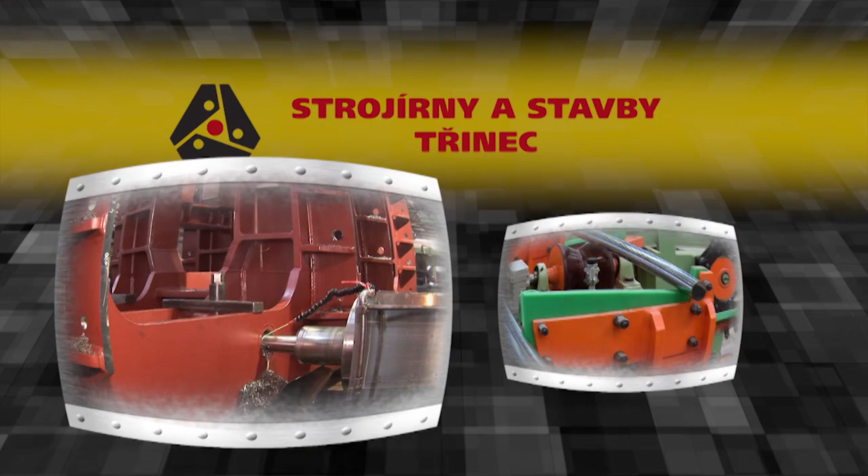Dear customers, this is a video presentation of Strojírny a Stavby Třinec, joint stock company based in Třinec, which is a 100% subsidiary of Třinecké železárny and a member of Moravia Steel Group. The company's production activities are focused on order-based manufacturing of engineering products and construction of industrial as well as civic buildings and facilities.

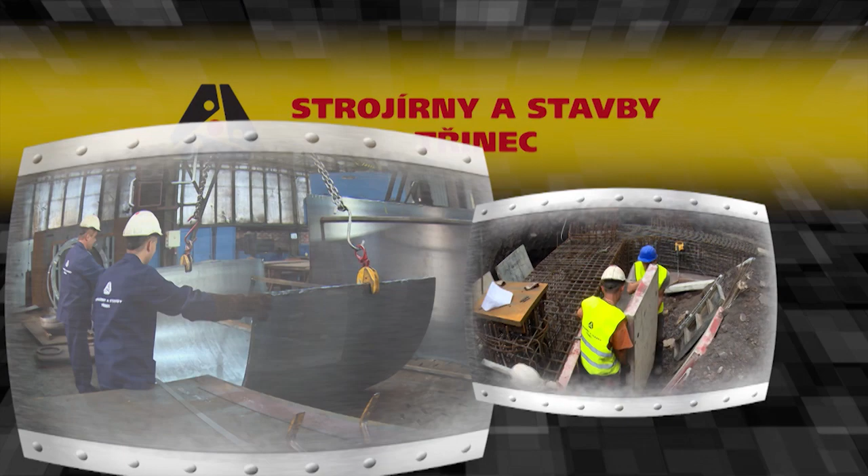The management system for quality and environment protection is based on international norms ISO 9001 and 14001, and our project management directives are applied in accordance with norms ISO 10006. Occupational safety and health measures on workplaces are based on OHSAS 18001. The company has also been granted a number of certificates and licenses for welding of complex steel structures, pressure vessels, as well as pipeline systems.

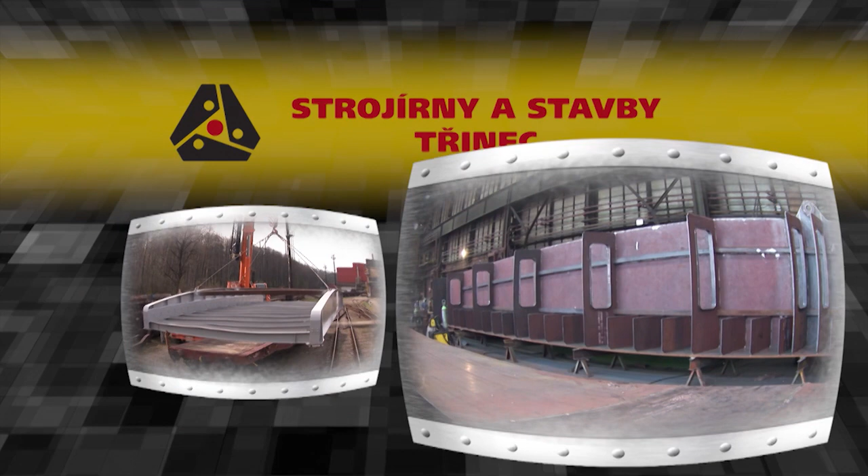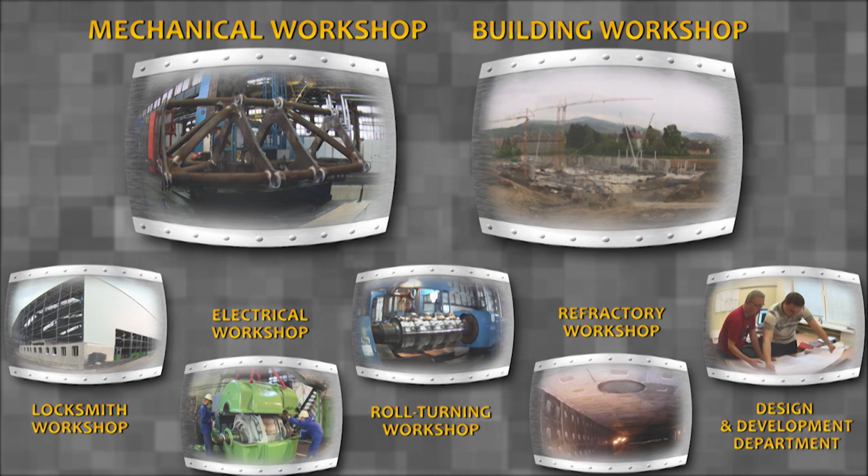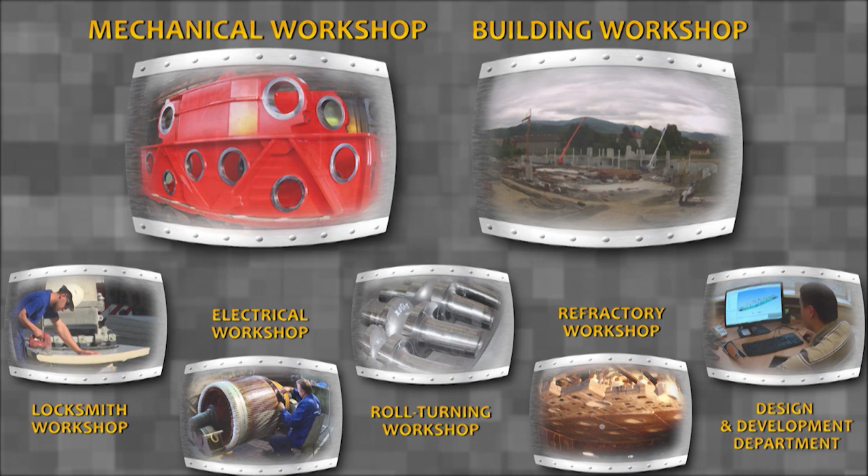The organizational structure of the company consists of 6 production plants and an independent design department. The main goal of the company is to be a reliable partner in the area of deliveries of engineering products and construction projects for domestic and foreign customers, as well as for the parent company, for which we carry out mechanical and electrical maintenance and repairs of steelmaking aggregates, refractory lining, and construction works.

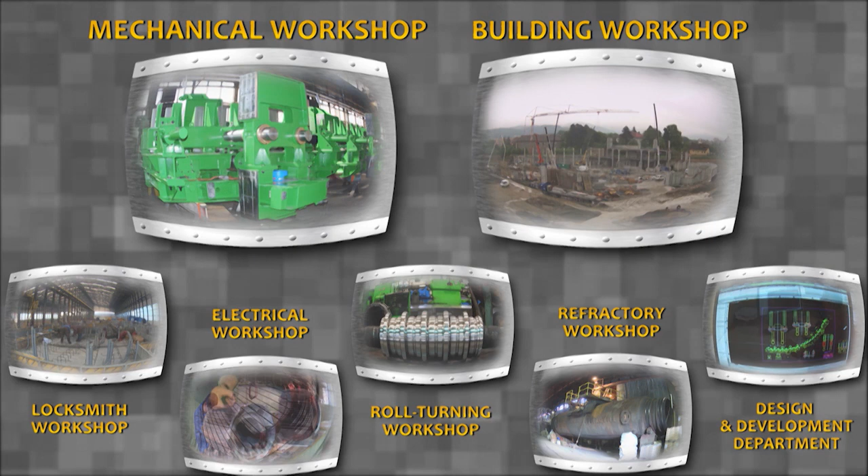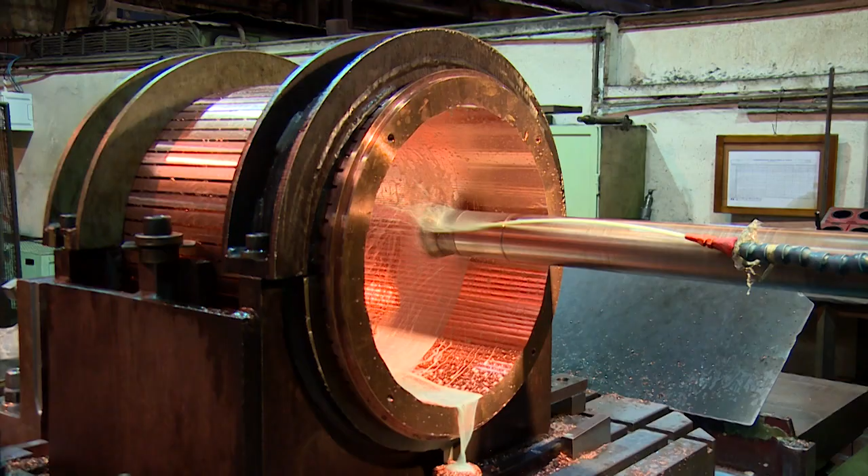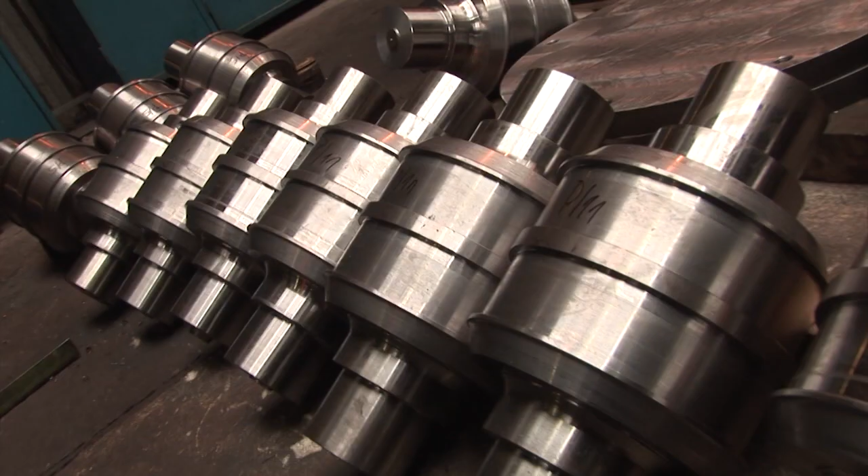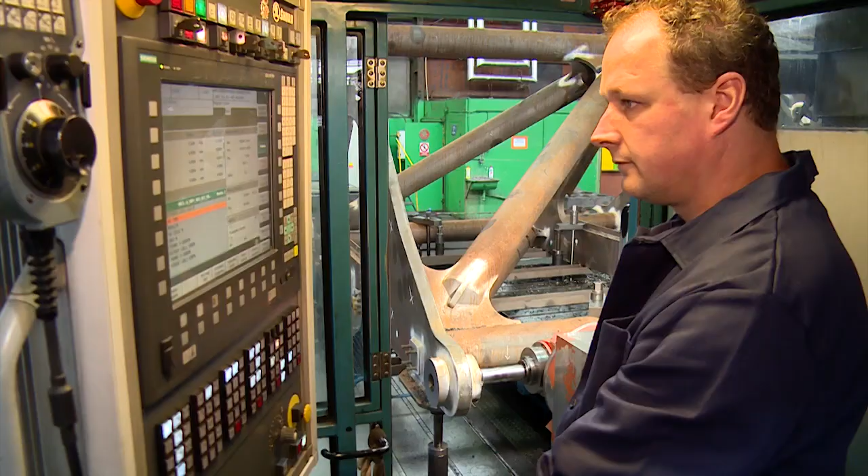Our engineering activities are focused mainly on piece production based on drawing charts with the aim to deliver high quality and precision of work pieces. This relates specifically to deliveries of complex engineering and technological units, conveyors, steel structures and weldments, offshore weldments, pressure vessels, cranes, machine parts and components, forgings and metallurgical rolls. Production of these products is realized in halls equipped with bridge cranes with maximum weight lifting capacity of 40 tons and a number of modern CNC lathes and metalworking machines.

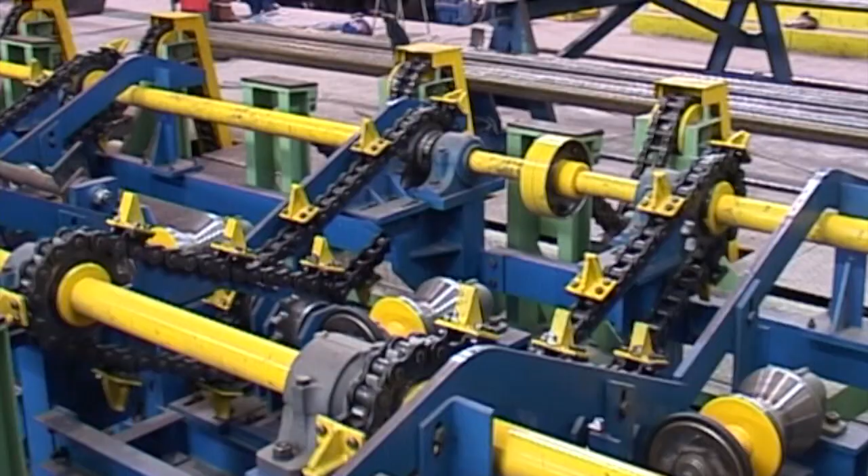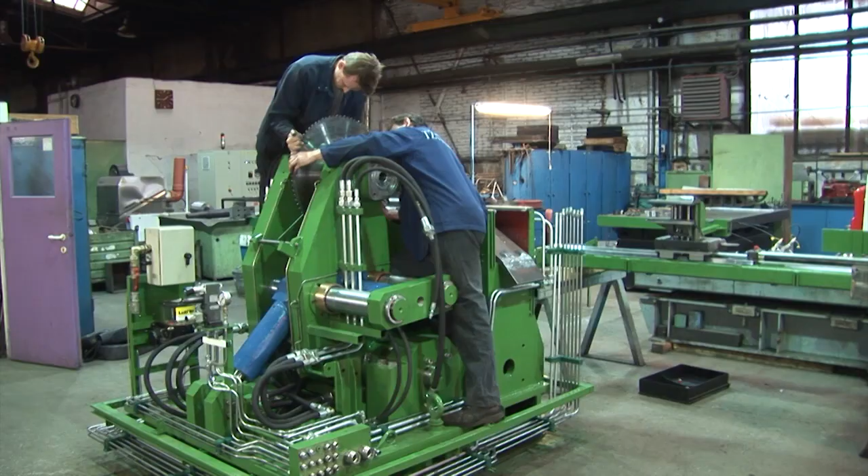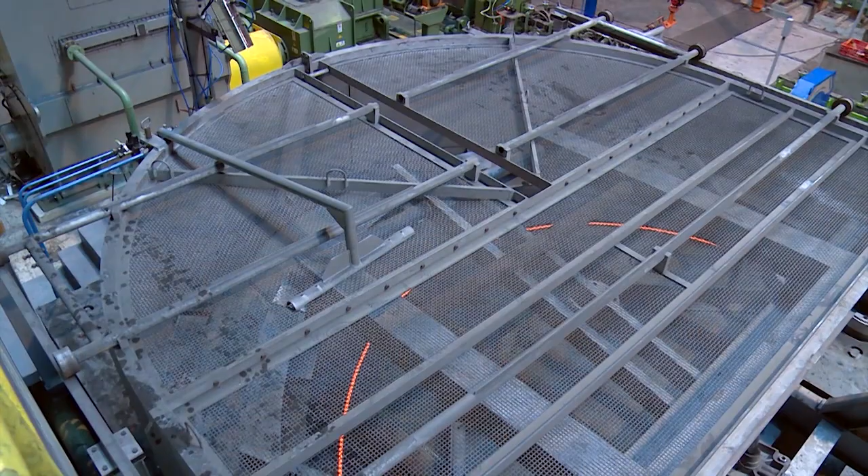In the area of engineering technological units, our company is focused mainly on deliveries for metallurgical industry, such as rolling mills, steelworks, and coke plants. We realize turnkey deliveries, which means they include deliveries of electrical installations, hydraulics, lubrication, and control systems. These shots, which were taken during reconstruction and modernization of the rolling mill, show some of the devices in the production process, such as the loop table for the wire rod mill, the straightening and tempering line, and a number of conveyors.

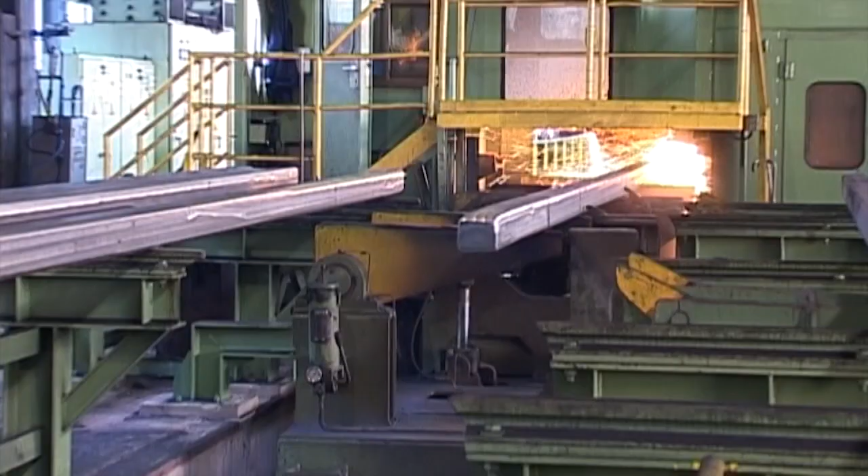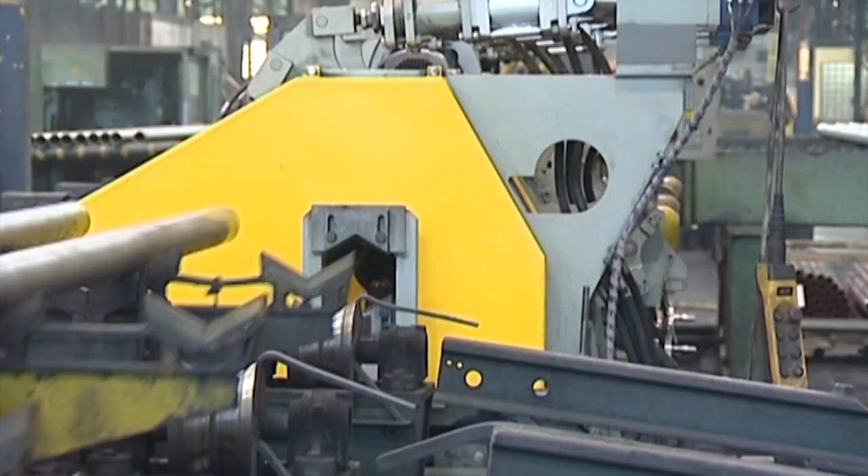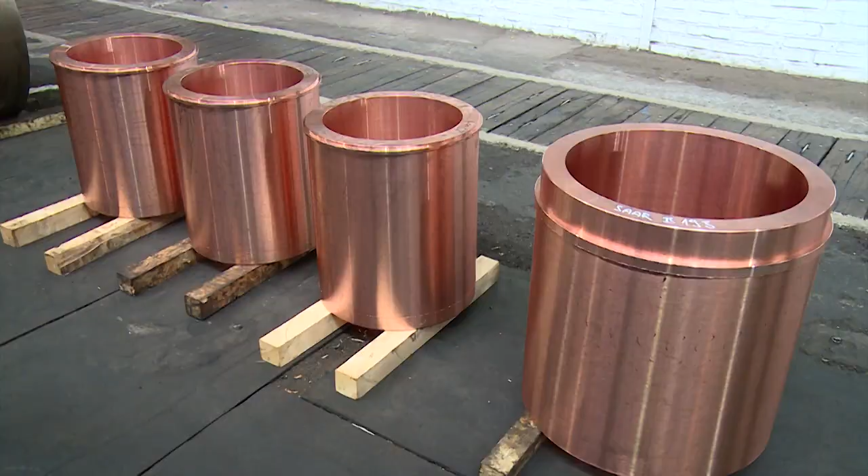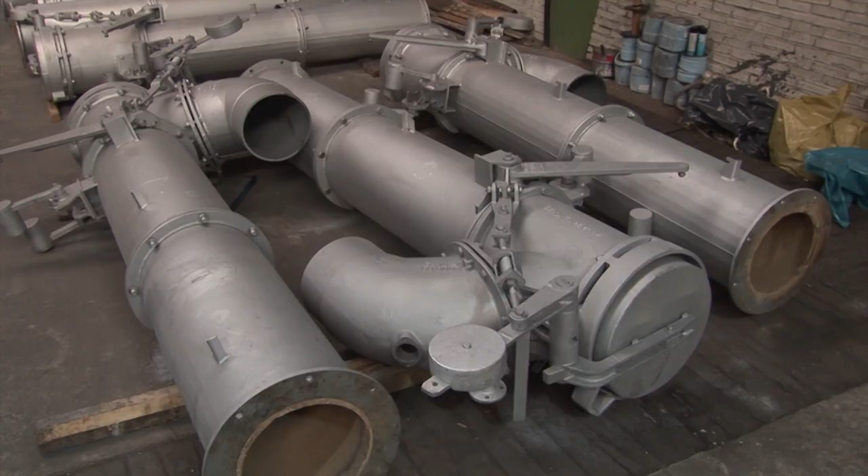Our designers also participated in realization of some products such as grinding machines for grinding blooms and billets, and the non-destructive testing bed, which is a part of the non-destructive testing line for detection of longitudinal or transversal defects in pipes. Our permanent assortment of deliveries for rolling mills comprises production of components for continuous casting machines, such as machining of copper crystallizers or production of casting components, whose assembly you can see in this shot. Within the project for modernization of the coke plant, we produced individual parts and ramming devices, which you can see undergoing functionality tests.

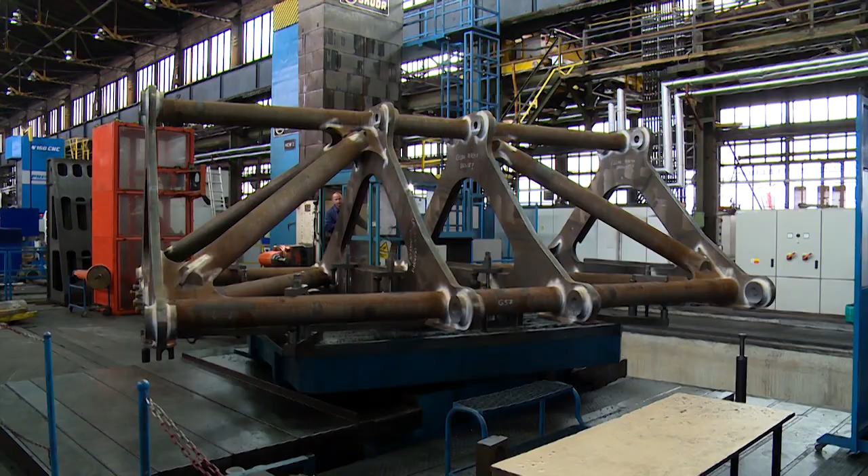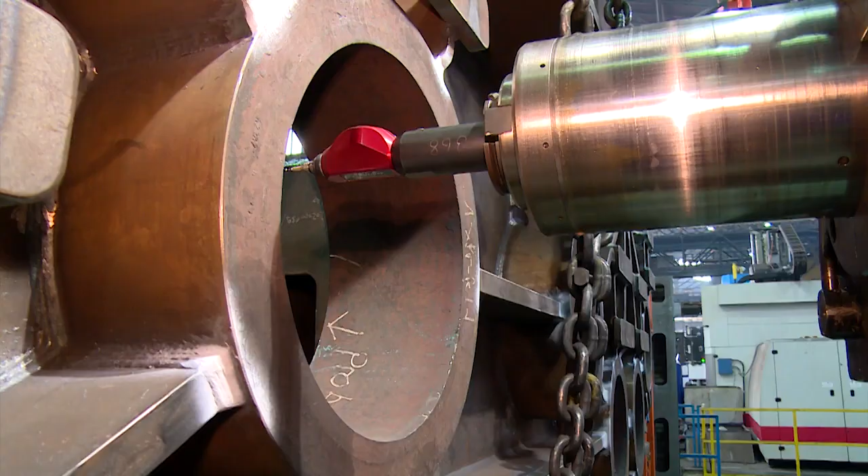Deliveries of offshore weldments represent another important activity of our company. In these shots, you can see how they are produced, from welding, precise machining on CNC machines, surface finishing, to final takeover by customers.

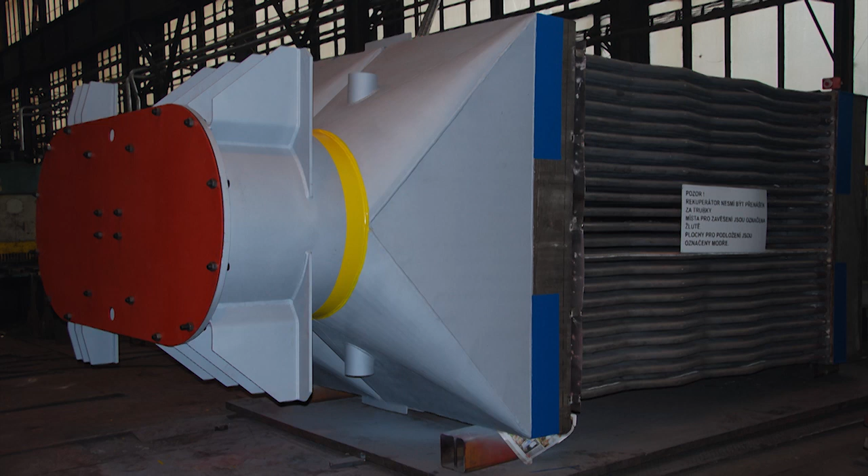In the area of energy production, our company is focused mainly on manufacturing of weldments for turbo machines, stainless recuperators, boilers for biomasses, and pressure vessels. As an example, we show our pressure vessels, specifically those used for storing nitrogen.

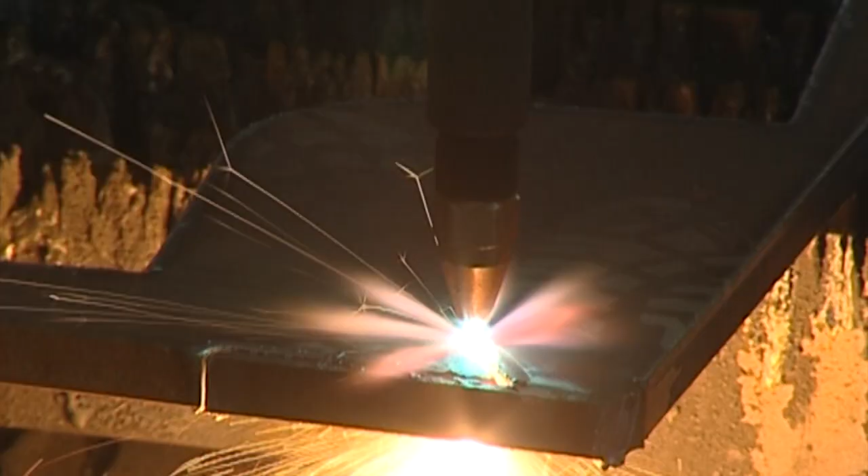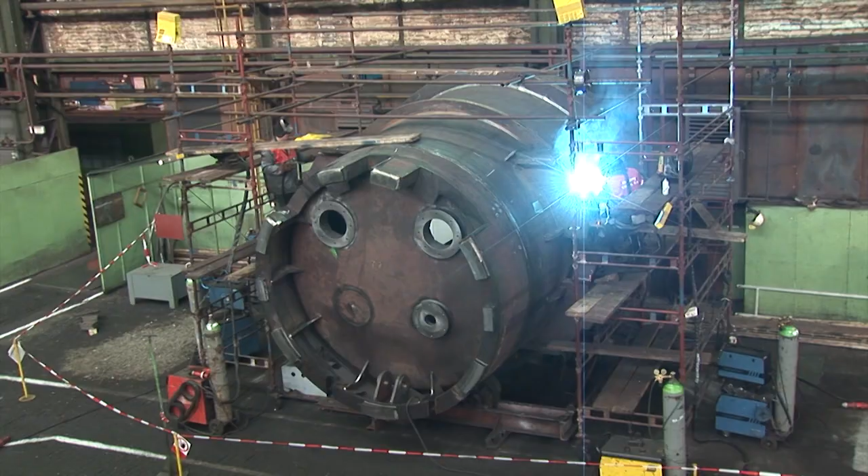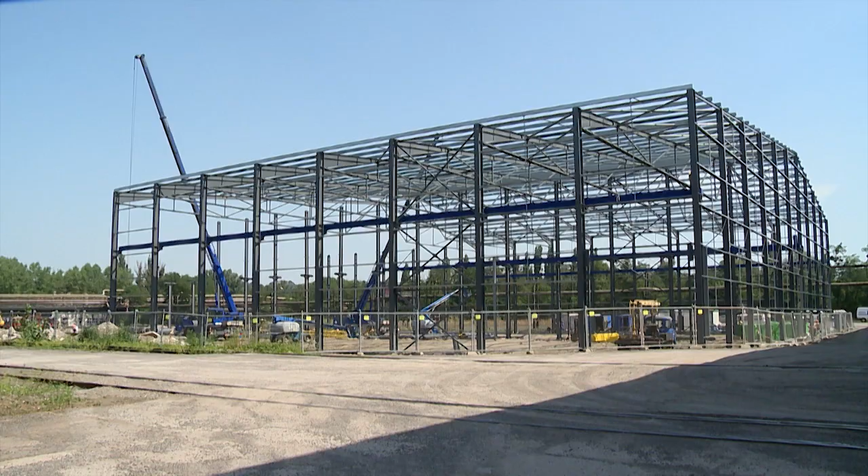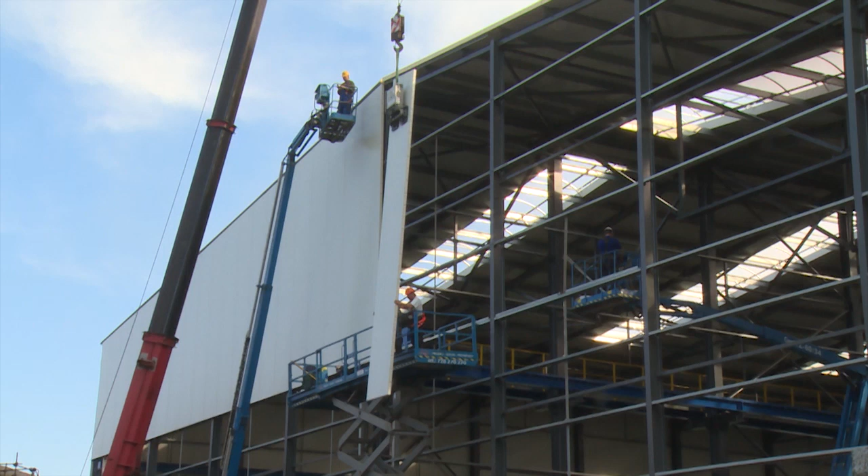We offer production of steel structures and weldments, including surface finishing operations, at the volume ranging from 200 to 300 tons per month. This group of products comprises, for example, production of welded ladles, including machining and annealing in order to release the structural tension, which are produced both for the parent company as well as for the external markets. The portfolio of steel structure deliveries also includes production and assembly of industrial production halls, including key delivery solutions such as electrical installations, lighting of production halls, as well as furnishing them with handling and lifting machinery.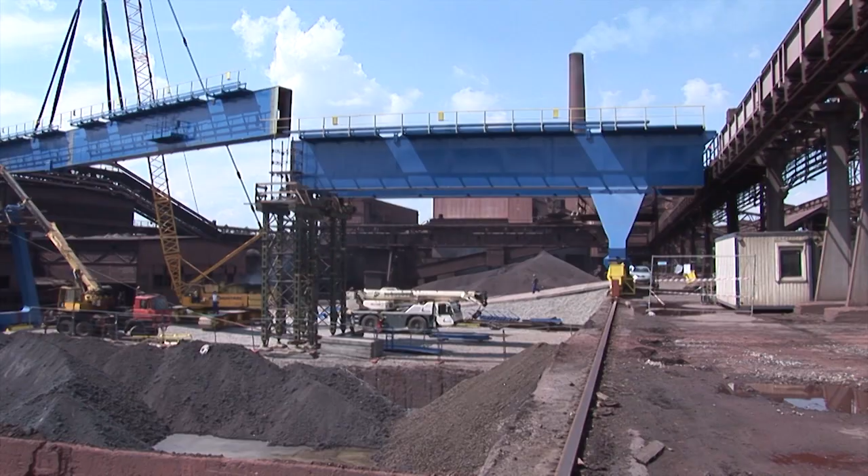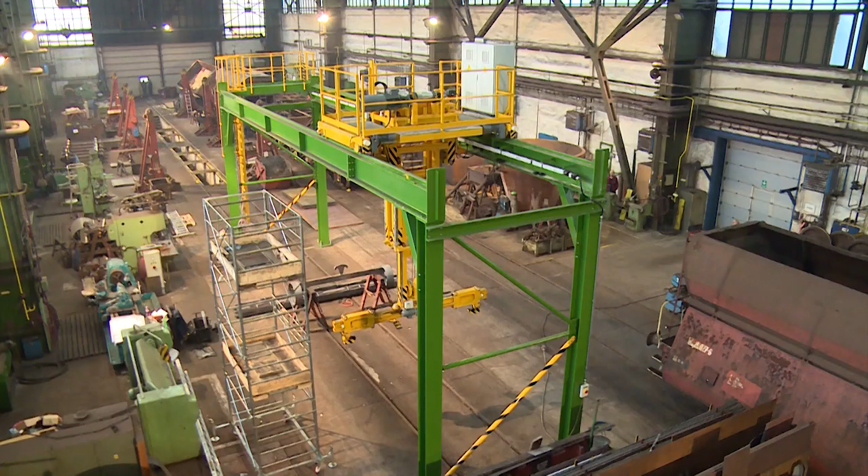We carry out manufacturing and repairs of industrial cranes and crane tracks, including turnkey deliveries, which include production, disassembling and on-site assembling of new equipment, electrical installation works, and putting in operation. In these shots, you can see the functionality test carried out on equipment for handling steel sheets, which was designed and manufactured by our company, assembled on-site, and put into operation for our customer in Asia.

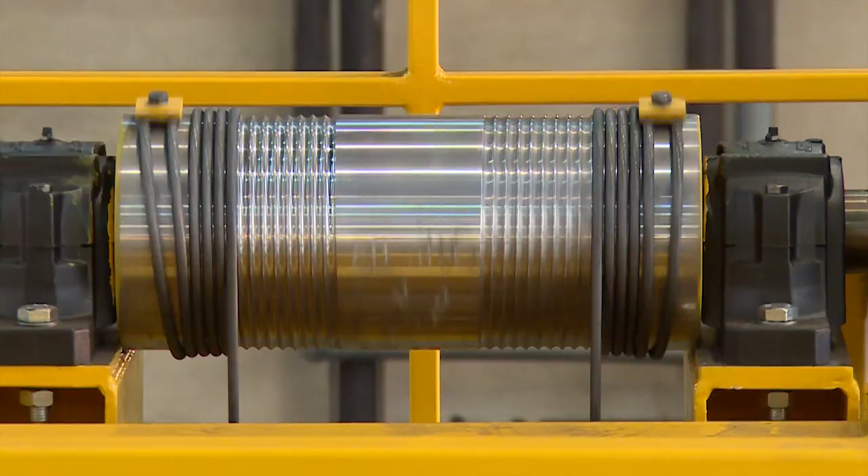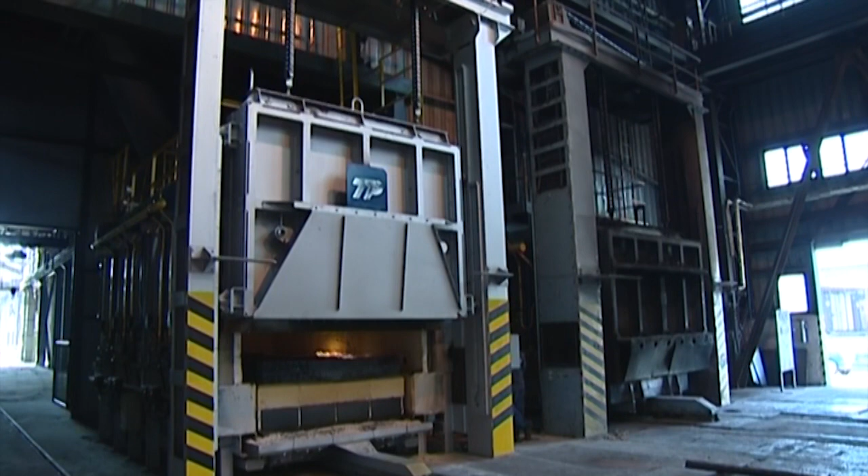The company's product portfolio also includes production of hammer forgings up to the weight of 3 tons. The input material is heated up in furnaces up to the forging temperature and then processed by means of the forging press. Forgings, especially forged bars and shafts, are offered as rough finished or final finished.

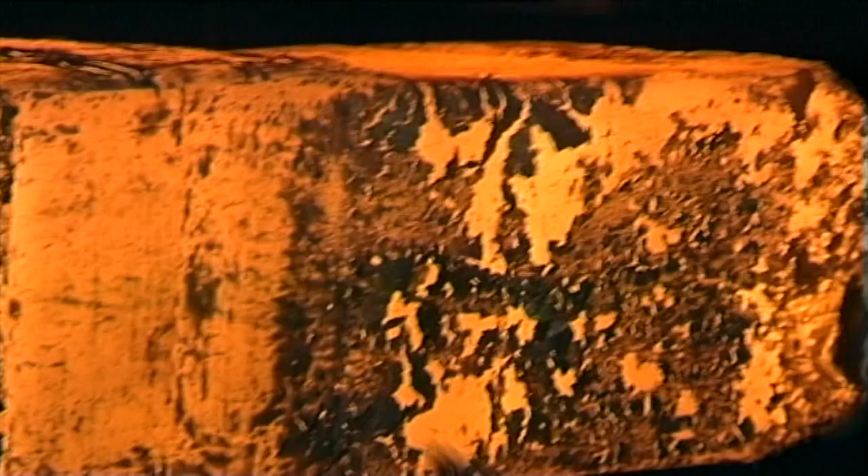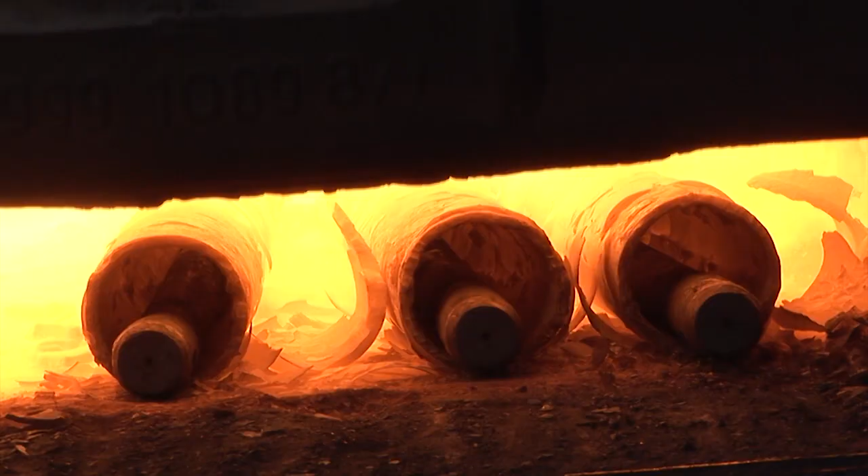New activities involve production of forged axles, including heat treatment and final finishing operations. Access to high quality and special grades of steel made by the parent company's steelworks makes it possible for us to respond promptly to the requirements and needs of our customers.

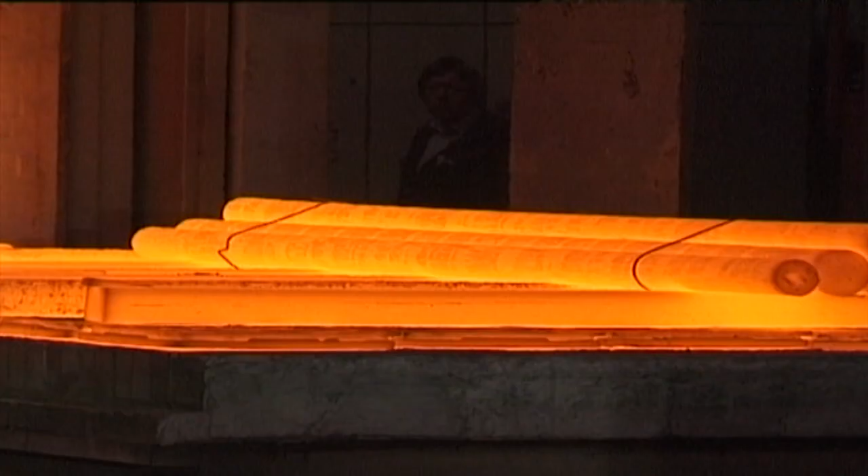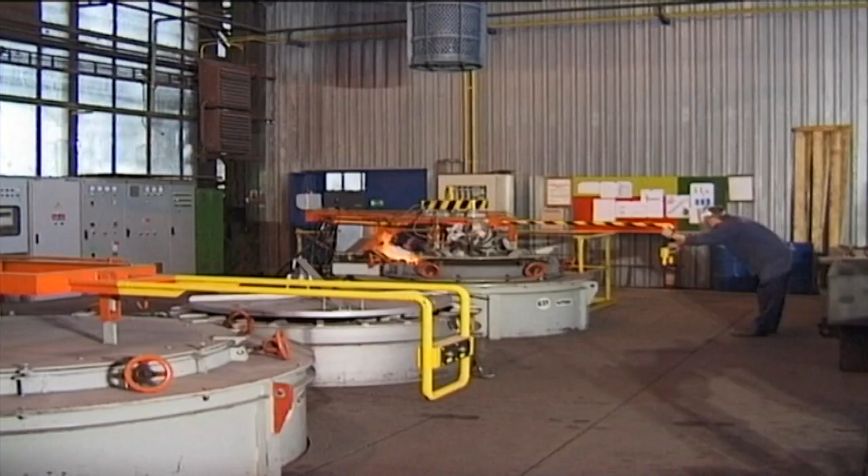After the forging shop, production continues in the heat treatment workshop, where forgings and other products are processed in accordance with applicable norms and requirements of our customers. Heat treatment is carried out in electrical car or shaft furnaces. We also offer heat treatment carried out by means of induction hardening and ion nitriding.

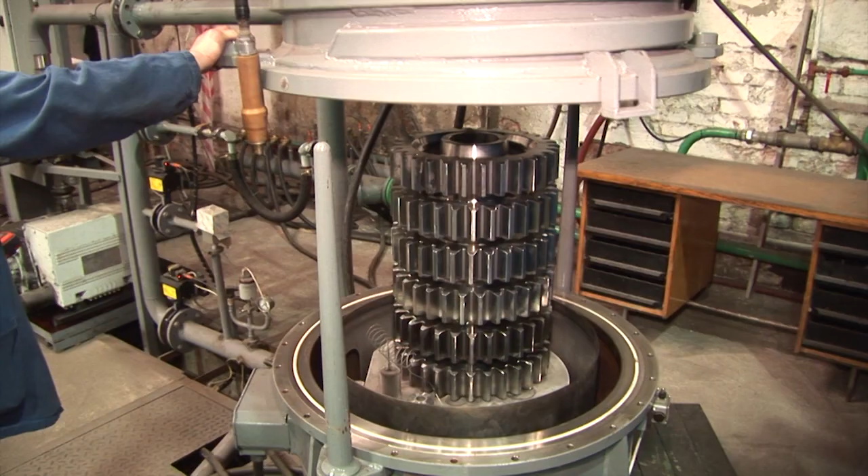In order to keep track of quality heat treatment operations, test samples are forged, which then undergo mechanical and metallographic tests in our own test workshop.

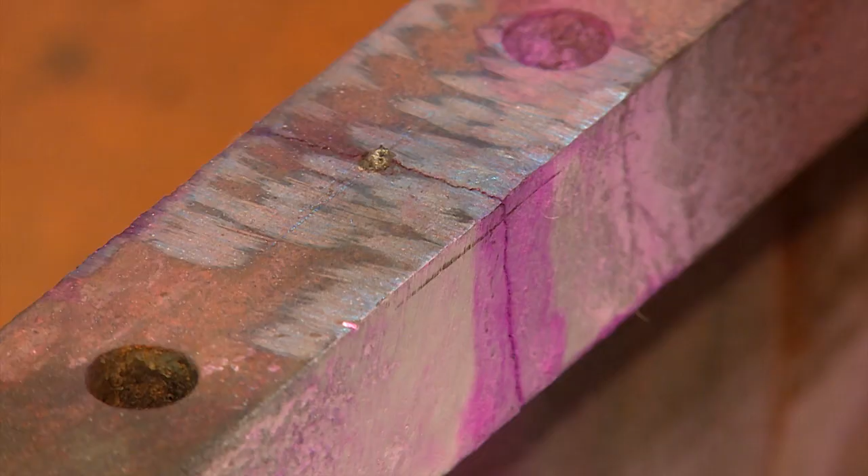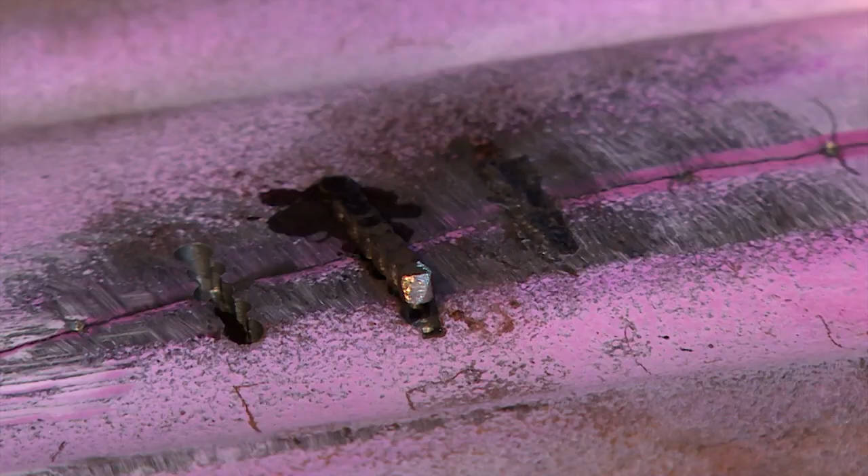Within the framework of our services, we also offer a special method for repairing cracked or broken off parts of castings and cast iron machine parts by means of the Metalock process, for which we hold a license for the Czech Republic and Slovakia. We repair cracked parts of castings in cold condition by means of steel locks made from

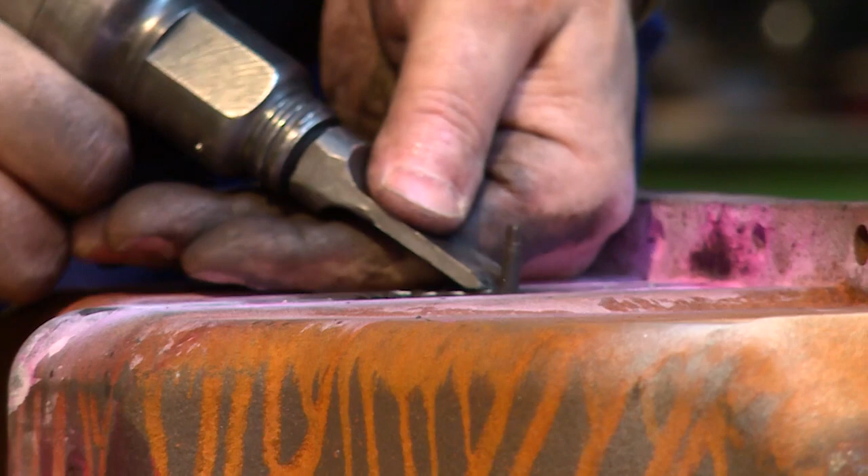special high-strength steel. The main advantage of this method is that it enables us to make repairs on the spot without having to disassemble the broken parts and thus eliminate the costs of a new component or a new machine. Repair of cracks and broken off parts doesn't cause internal tension, and the strength and tightness of the connection is comparable with the original material.

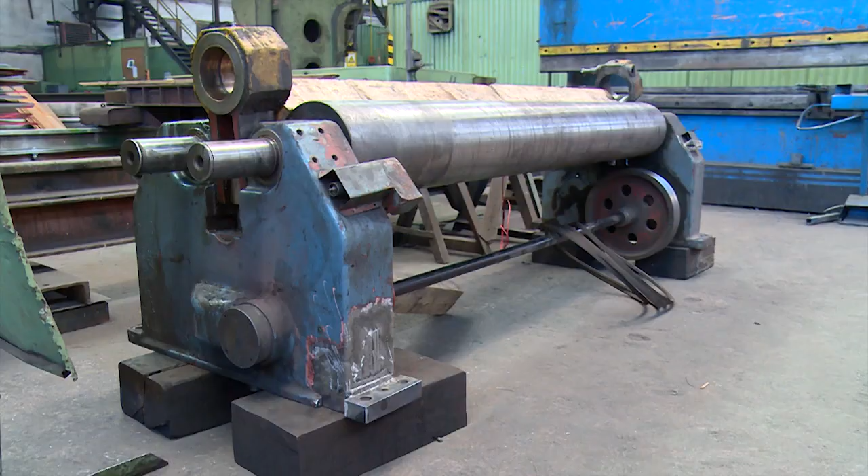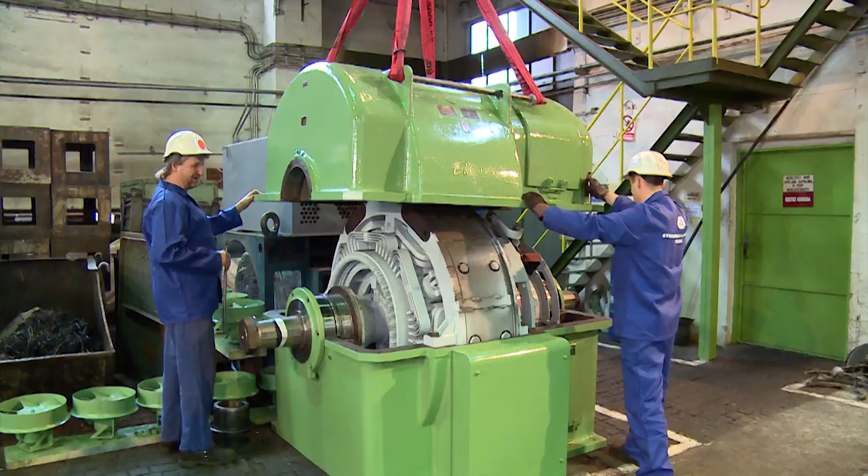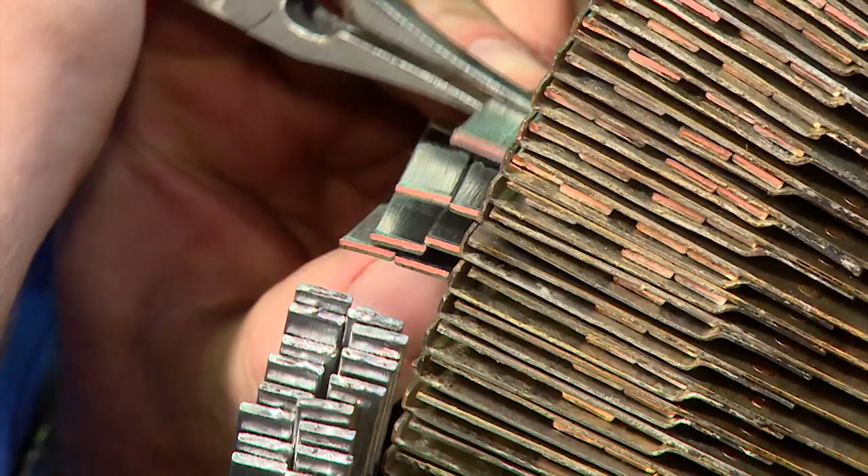Within electrical engineering works, we also offer technical inspections, repairs and rewinding of electric motors ranging from the lowest power rates up to high power motors of several megawatts. Besides that, we offer repairs of generators up to the power rate of 20 megawatts, repairs of transformers, crane load magnets, separators of welding equipment, and other electrical equipment.

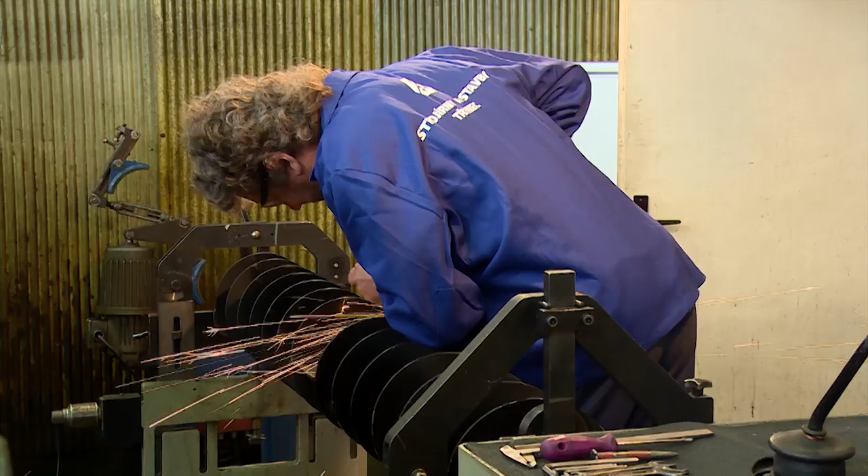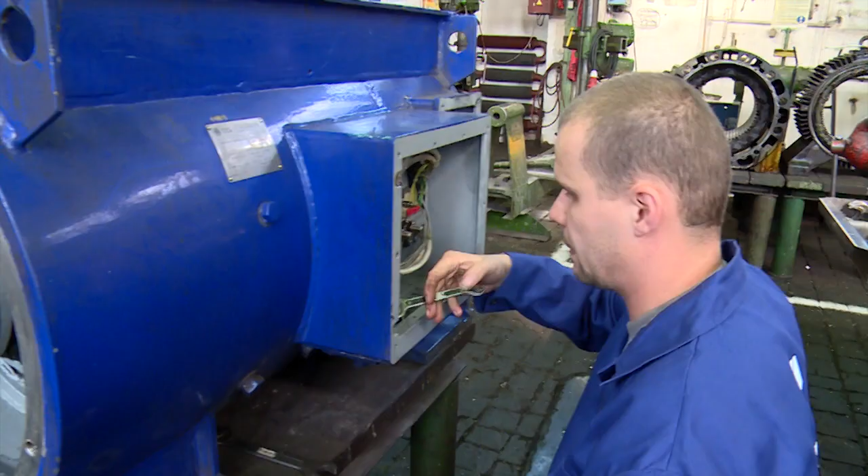Balancing rotating parts such as rolls, scroll feeders, and motor rotors is carried out on a stationary balancing machine. Electrical engineering works include installation of industrial low voltage and high voltage lines, production of switchboards and electrical fire alarm systems. Repairs and technical inspections of measuring devices, including calibration, are carried out in a certified laboratory.

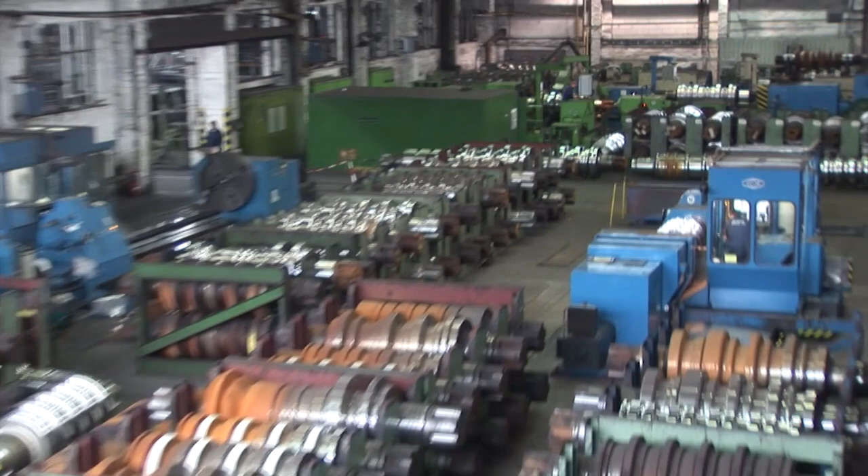We also carry out other activities such as production of metallurgical rolls, which has become our 100-year-old tradition. Calibration of rolls is carried out on the CNC lathe, on which we machine cast steel rolls, nodular cast iron, or forged rolls up to the weight of 40 tons.

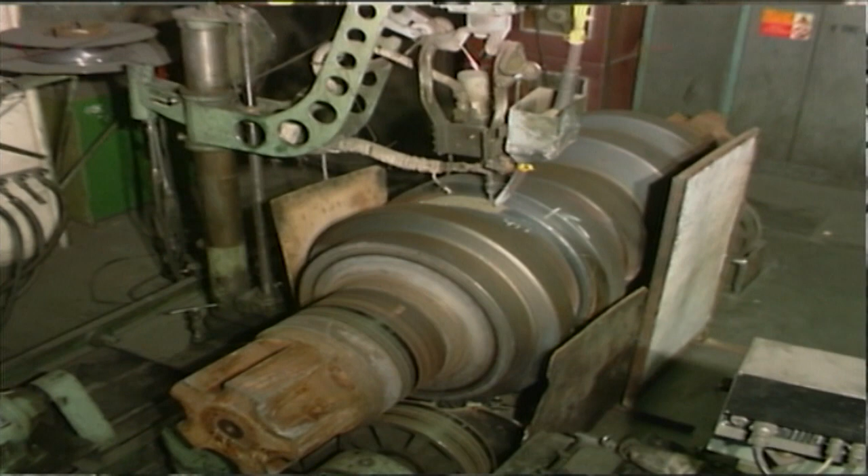We produce rolls as finished products, including their calibration, according to customers' requirements. We also provide renovation of rolls by returning or surfacing. Grooves and producers' marks on rolls for rolling reinforcing bars are made by means of milling.

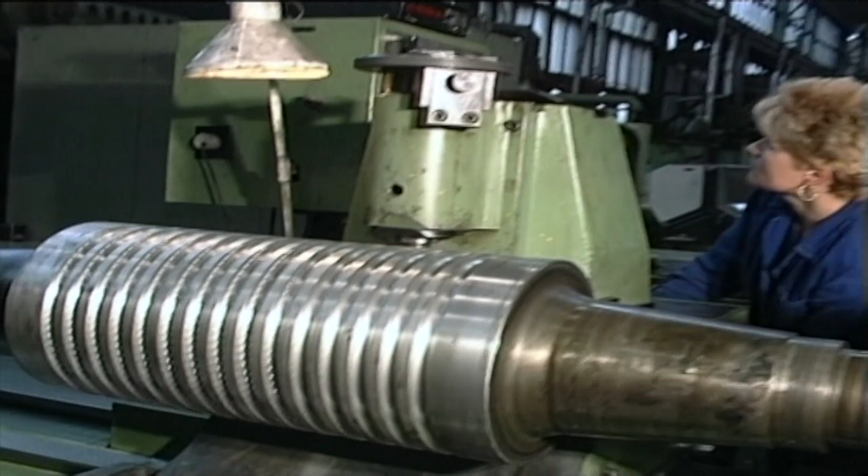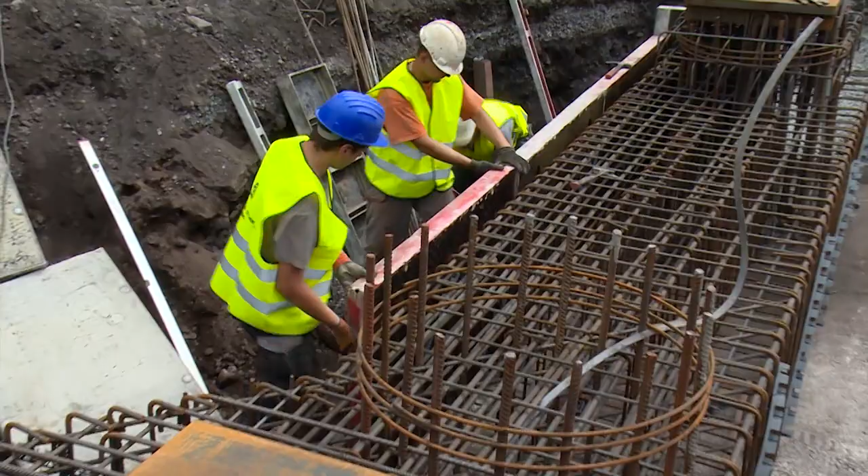In the area of construction works, we realize complex construction activities for civic and industrial turnkey projects, which include electrical installations and lighting.

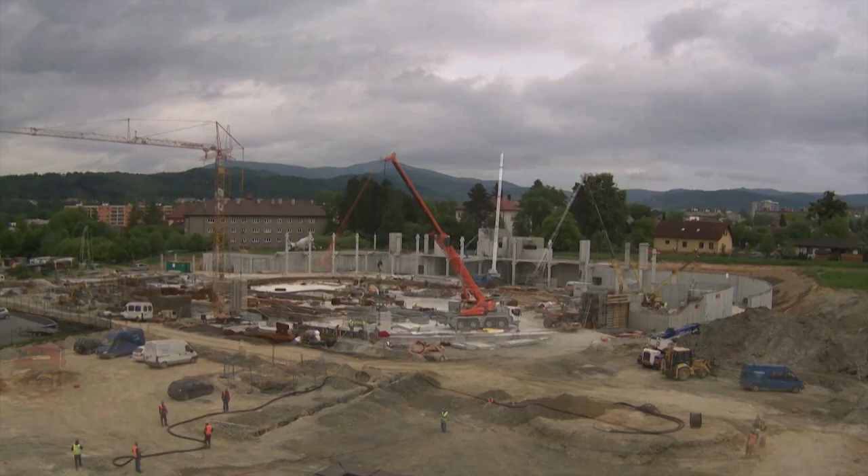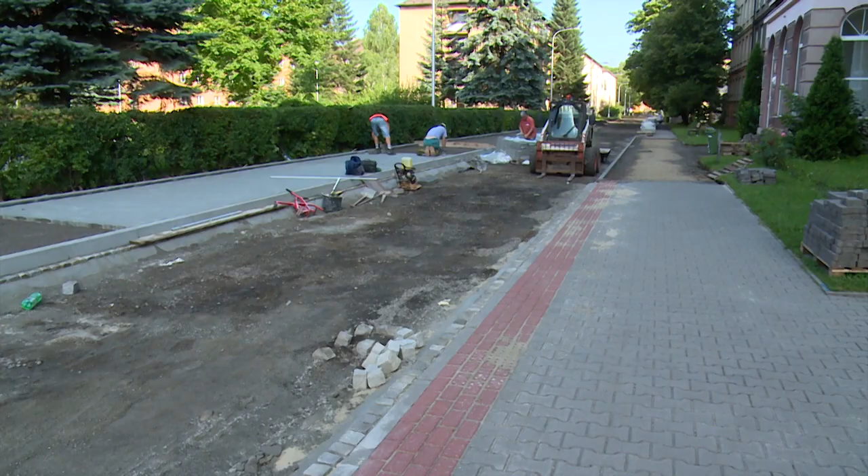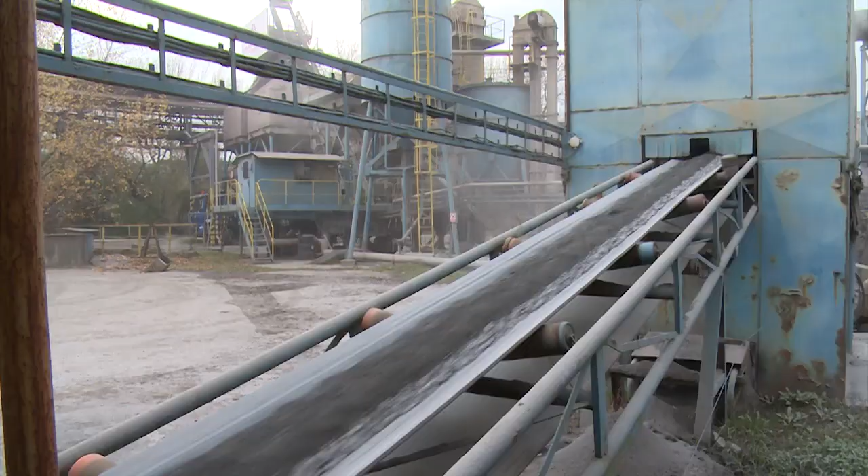Our building and construction activities also involve building and repairs of street pavements and the ground transportation infrastructures. The asphalt mix, which is used for making the final layer for surface finishing operations, is made in our own wrapping shop and is tested in our own laboratory.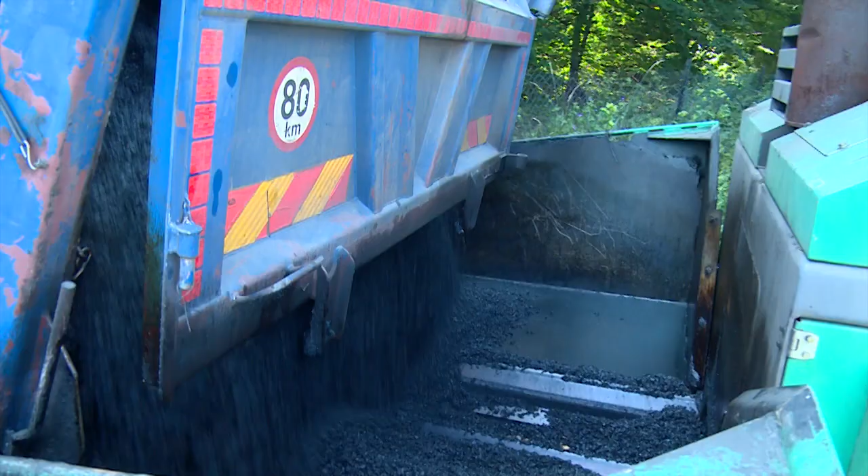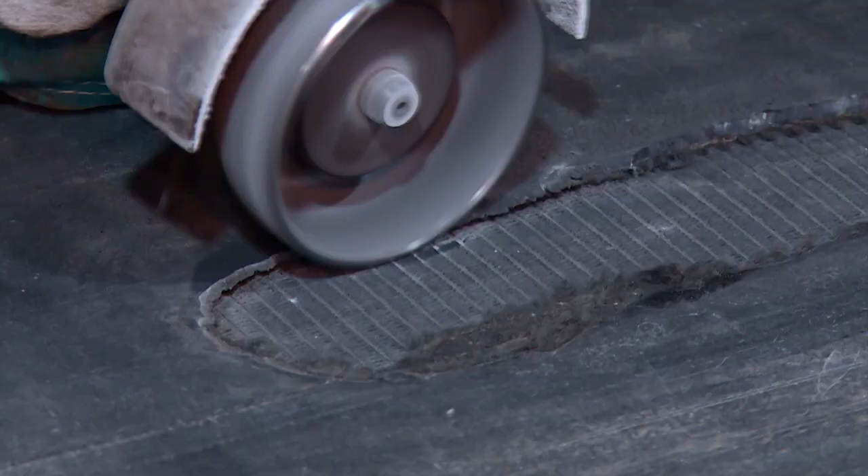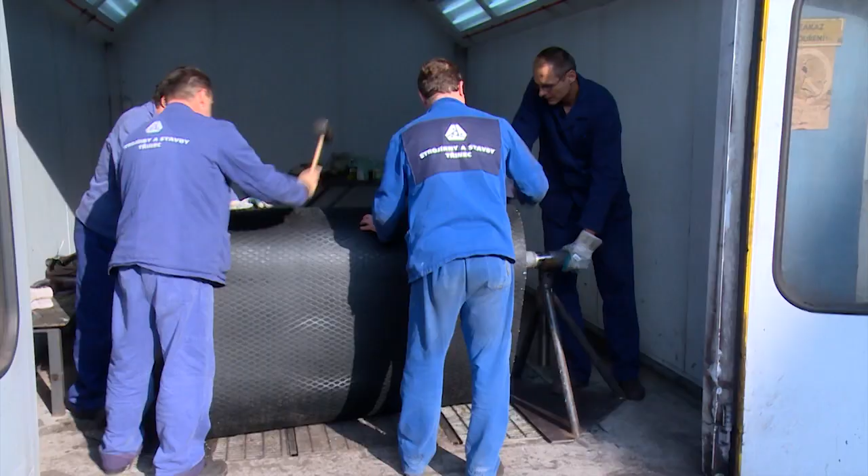In the vulcanization shop, we carry out repairs, replacements, and renovation of rubber conveyor belts on the renovation line. In this workshop, we also make pressed rubber products, rubber coating of drums and rollers.

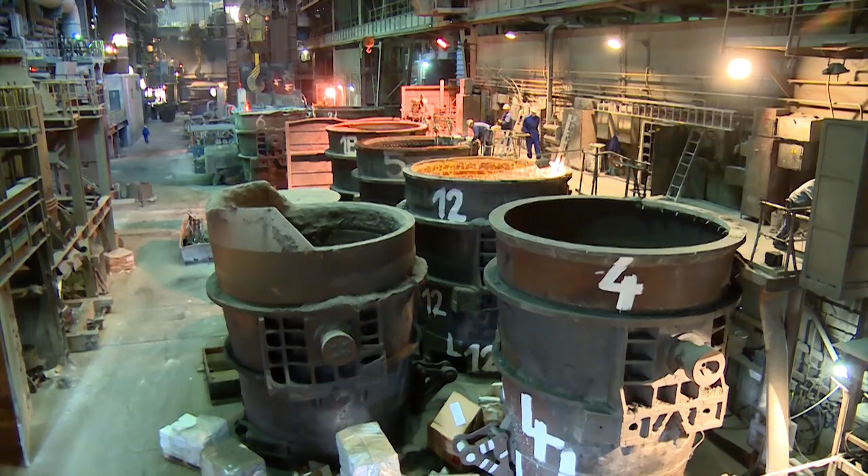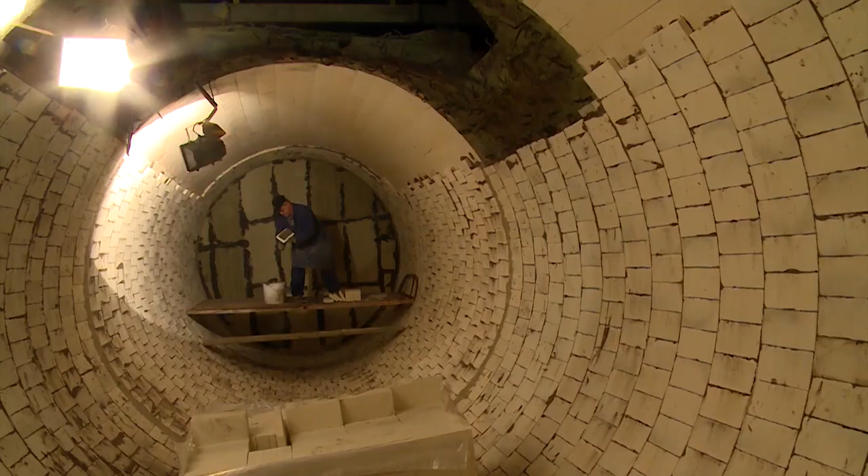Within our refractory works, we carry out repairs of refractory linings in metallurgical aggregates, not only for Třinec Ironworks, but also for external customers. We also carry out demolition works and build refractory linings in ladles, intermediate ladles, and furnaces.

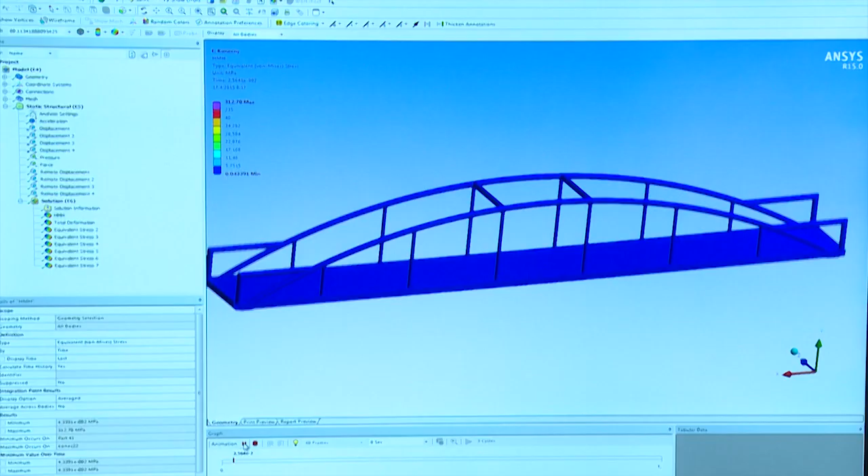The design department, in which mainly production facilities are designed, includes 3D simulation. Eliminating collision situations constitutes an inseparable part of the company. Besides that, the department provides detailed drawing of production charts taken from basic engineering, designing and calculating parameters of pressure vessels, as well as making calculations of strength of design mechanical parts.

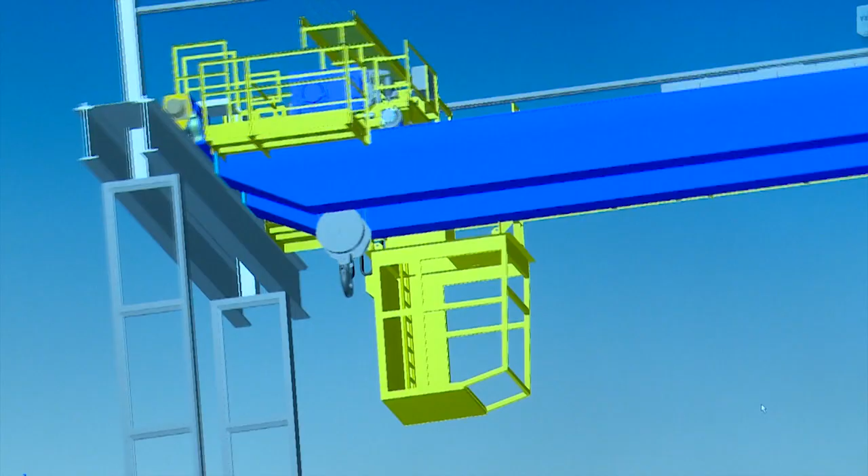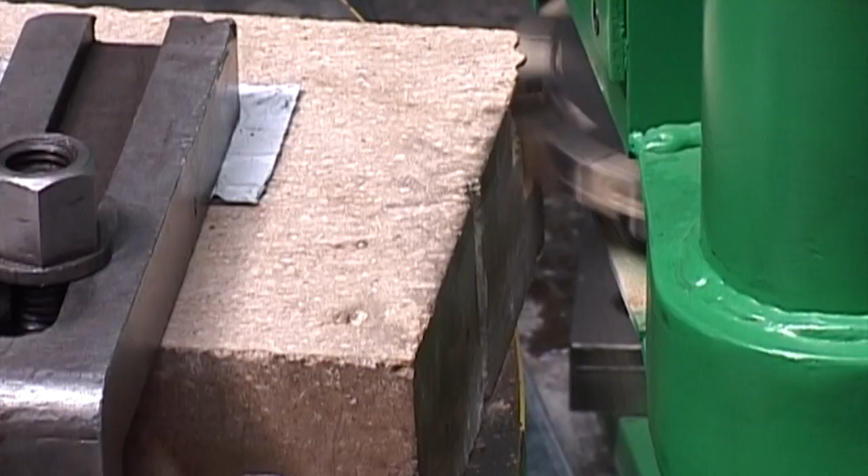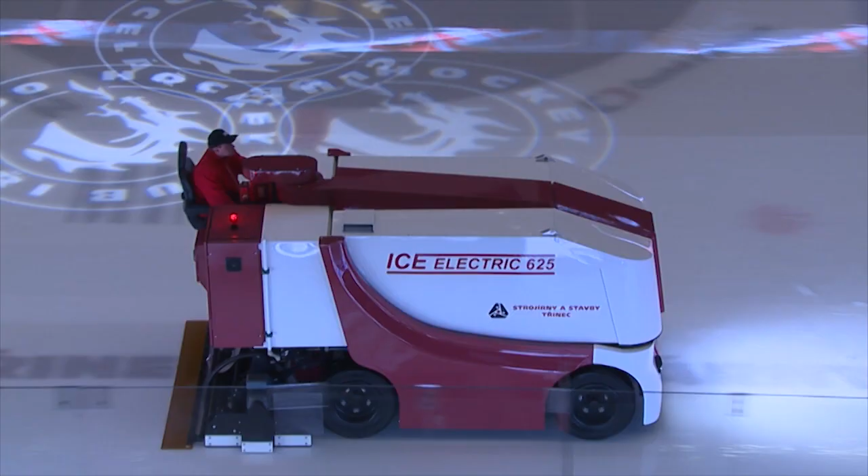The company Strojirny a stavby Třinec exports its products to many countries all over the world. Increasing demand for our products and services proves that our company has the technical capacity and know-how, enabling us to meet the needs and requirements of our customers.

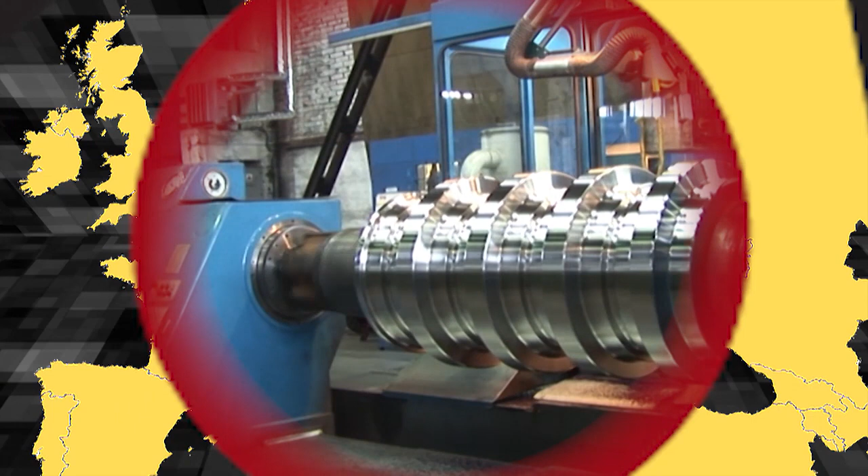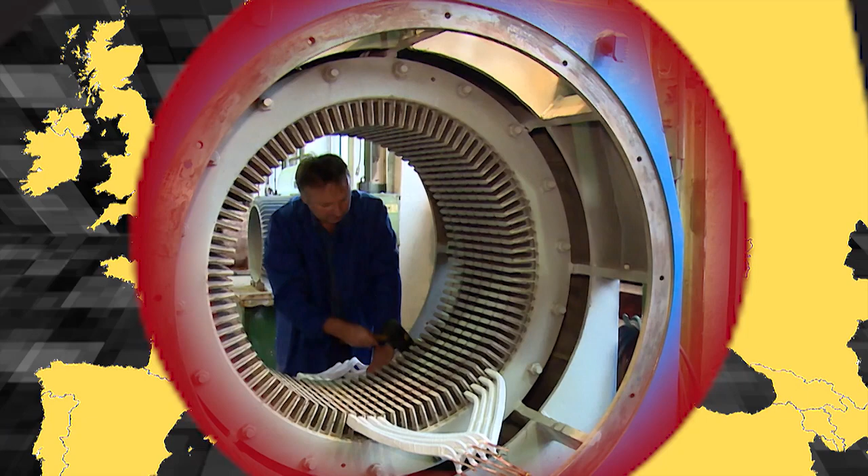Dear customers, our staff is ready to meet your needs and expectations, and thus fulfill the vision of our company to be a well-established and sought-after partner in the area of engineering, production, and construction projects.